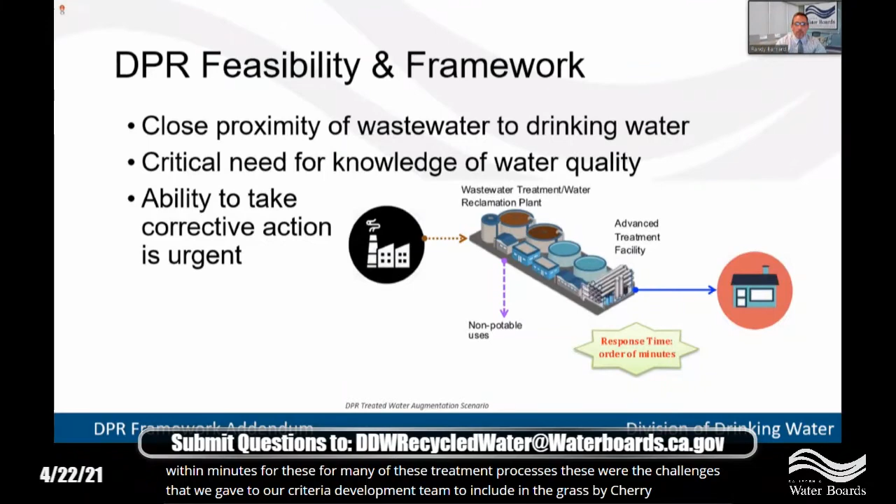So we need to know for sure what the water quality is going into the treatment process and coming out of the treatment process. And we need to be able to detect when there's a problem and be able to take corrective actions to prevent any off-spec water from getting to the public. And this has to happen fast, within minutes for many of these treatment processes. These were the challenges that we gave to our criteria development team to include in the draft criteria. So with that, let's take a look at that criteria. Next slide, please.

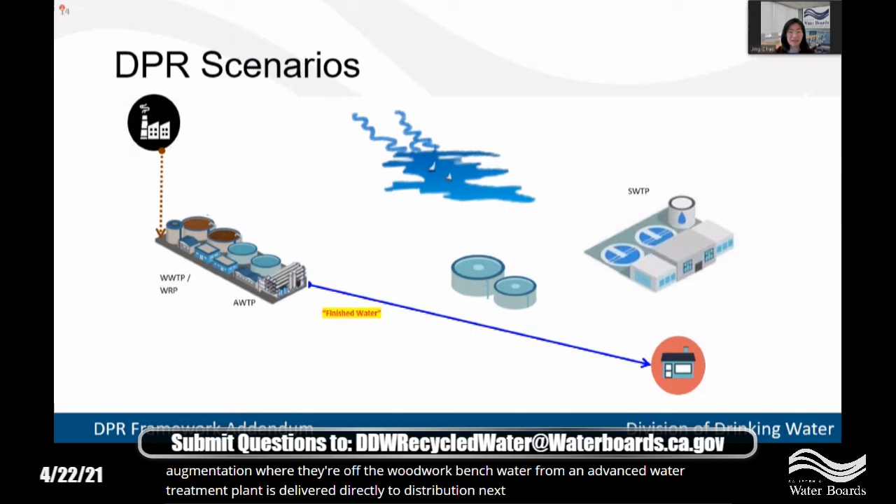We also considered complex DPR scenarios with multiple agencies and different qualities of water discharged for various reuse opportunities, ranging from non-potable to indirect potable to direct potable reuse. Through discussions with projects, we have a good idea of what DPR scenarios are being considered, but it is likely we haven't thought of everything. We're looking forward to comments regarding application of the draft criteria to DPR scenarios that we might not have considered. Next.

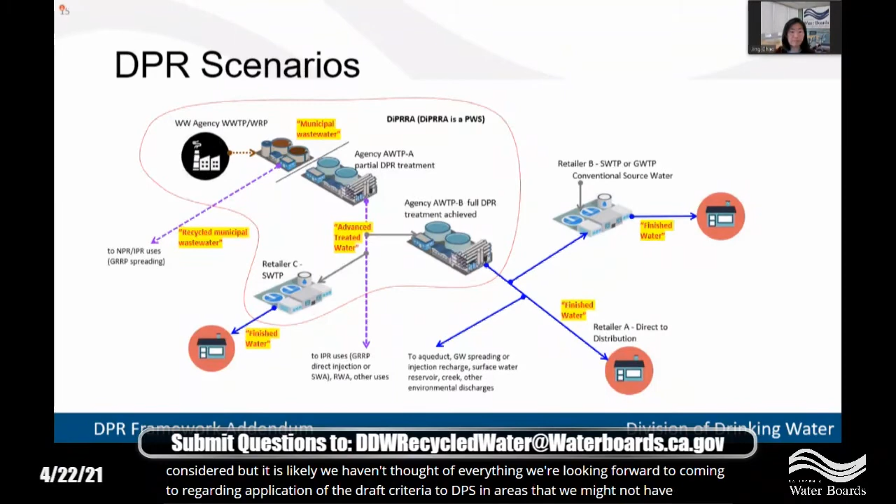So regardless of the complexity of a DPR project or the number of agencies involved, each project must designate one agency, called the DiPRRA, that will be responsible for submitting a drinking water permit application for the project and for complying with the DPR regulations and permit provisions. Similar to IPR requirements, a public meeting must be held for the project as part of the permit review process. Public water systems receiving finished water from a DPR project will also need to submit drinking water permit applications and receive permit approval from DDW before the new supply can be used.

The other agencies that are involved, including wastewater management agencies supplying the municipal wastewater source for the DPR project, and each agency that provides pathogen and/or chemical treatment pursuant to the DPR regulations will be required to be partner agencies in the joint plan. So the joint plan describes the partner agencies involved in the project, the roles and responsibilities of the partner agencies, the legal authority of each to fulfill its role, and the overall organizational structure involved in implementing the joint plan, among other things.

The DiPRRA must submit an updated joint plan when there's a change in the organizational or legal structure of the DPR project management. Each agency in the joint plan needs to demonstrate TMF capacity. Establishing the legal authorities, roles, and responsibilities, and the structure of the overall DiPRRA organization for the DPR project is foundational to ensuring safe drinking water. Next.

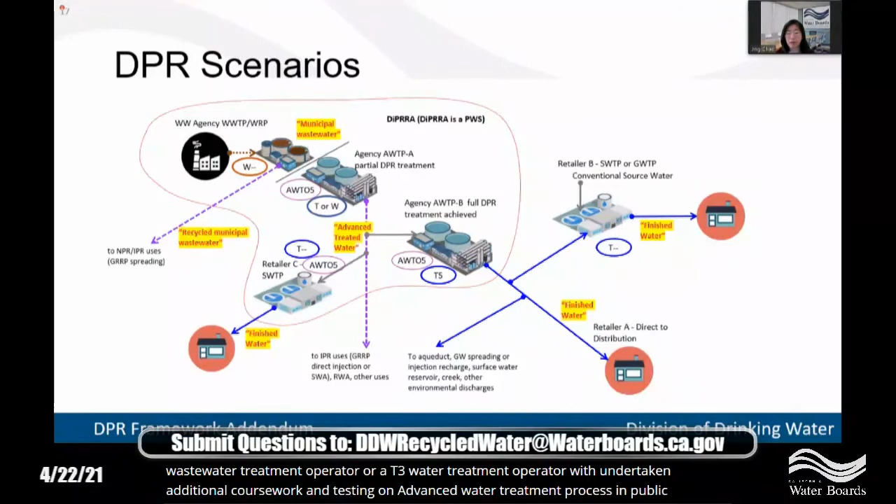An operator with an AWTO certification is at minimum a grade 3 wastewater treatment operator or a T3 water treatment operator who has undertaken additional coursework and testing on advanced water treatment processes and public health safe drinking water concepts. The AWTO certification program was established jointly by the Cal Nevada AWWA and CWEA in 2019. Now with that, let's go over to the next section where Bob Hultquist will speak on the pathogen criteria. Thanks. Bob?

Thank you, Jing. Pathogenic microorganisms pose an acute threat unless continuously controlled by removal and inactivation. Several sections of the criteria deal with the control of this threat. Next slide, please. First, an overview of the pathogen control components. We set pathogen reduction targets to achieve specific health risk goals. Treatment reliability is achieved by requiring multibarrier treatment, diverse mechanisms in that treatment, and redundant treatment. Redundant treatment is extra treatment above that minimally necessary to make safe drinking water from the wastewater. And redundant treatment was called for by the state's direct potable reuse expert panel.

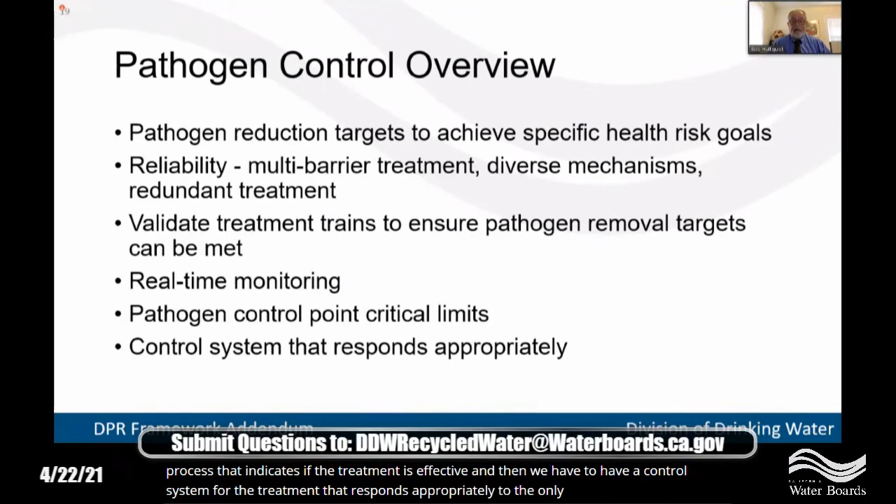We validate treatment to ensure the pathogen removal targets can be met. We require real-time monitoring, that's online monitoring of treatment performance for each process. We set pathogen control point critical limits. The pathogen control point is the effluent from each pathogen removal process. And the critical limit is a monitoring value for each treatment process that indicates if the treatment is effective. And then we have to have a control system for the treatment that responds appropriately to the online monitoring information. Next slide, please.

We establish a risk goal for these criteria for pathogenic microorganisms. In drinking water regulations, such as the surface water treatment rule, the goal has been 1 in 10,000 chance of infection per year for an individual. We've also used that goal for our indirect potable reuse regulations. For direct potable reuse, because of the close proximity of the wastewater pathogen levels to the drinking water, we've decided we need a daily risk goal. In other words, we want very consistent production of safe water out of this treatment plant. So we divide the annual risk by 365, and the criteria have been designed such that every day that daily risk will be met.

We establish reference pathogens. That's a set of pathogens that if we regulate and if they're controlled, all microbial risk will be dealt with from the wastewater. We've selected virus, Giardia, and Cryptosporidium, as we did for our indirect potable reuse regulations. Those are the same reference pathogens used in the drinking water surface water treatment rule. Indeed, direct potable reuse has to comply with the surface water treatment rules, both the federal and the state, because the wastewater can be considered a surface water.

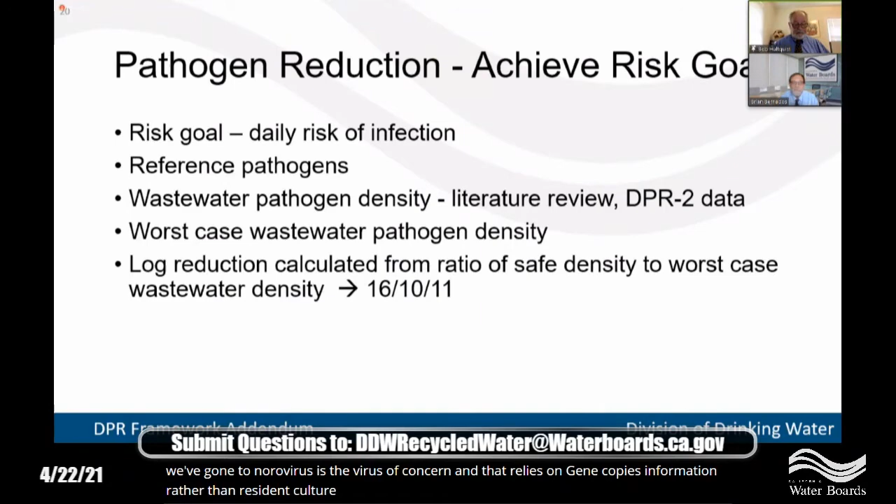We achieve reliability in the treatment for pathogens by requiring for each reference pathogen at least 4 effective pathogen treatment processes. And they have to include at least 3 different mechanisms for pathogen reduction. And we specify in the regulation physical separation, chemical disinfection, and ultraviolet disinfection.

The redundant or extra treatment called for by the expert panel, we're determining the amount of that extra treatment using a quantitative microbial risk assessment approach to evaluating failure scenarios. In other words, what sort of plausible or possible failure might quantify the extra treatment that would be needed. And the failure scenario we ended up with indicated a four log reduction of treatment loss was possible. And so we've added that on to the minimum treatment necessary to provide safe water as a design requirement.

So the overall design of a treatment train has to be able to achieve 20 log, 14 log, and 15 log respectively for the virus, Giardia, and the cryptosporidium. Next slide, please.

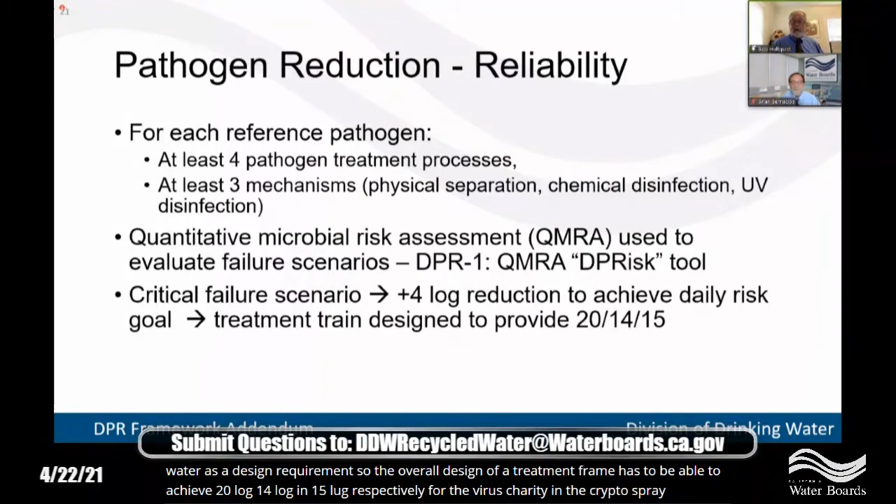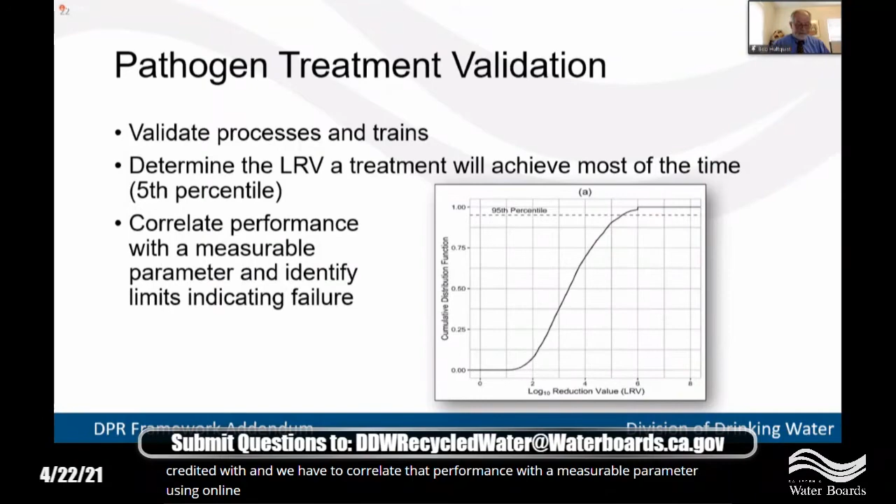And we credit each process with its 5th percentile log reduction. And that's down in the lower left-hand end of the curve. So 95% of the time, the process will be achieving better treatment than we credited it with. And we have to correlate that performance with a measurable parameter using online monitoring. Next slide, please.

Briefly, we validate each process by identifying the mechanisms of pathogen reduction by that process. We don't approve black boxes. We have to fully understand how the process works for each of the pathogens. We have to identify the pathogens to be used in the demonstration study or the surrogates for those pathogens. We have to identify the influencing factors that affect the efficacy of the process, things such as temperature, pH, loading rates.

And the study has to describe the method to collect and analyze the data. And again, the lower 5th percentile log reduction that it achieves during the study is the credited log reduction. And we determine critical limits, critical limit being the cutoff point for the monitoring data where you no longer have confidence in the efficacy of the process. Next slide, please.

The treatment train for log reduction for virus, Giardia, and cryptosporidium is the sum of the treatment process individual 5th percentile log reductions. Any pathogen control point parameter that is not meeting the critical limit means the treatment process is not allowed the credited log reduction, and the control system deletes that treatment process in its compliance calculation.

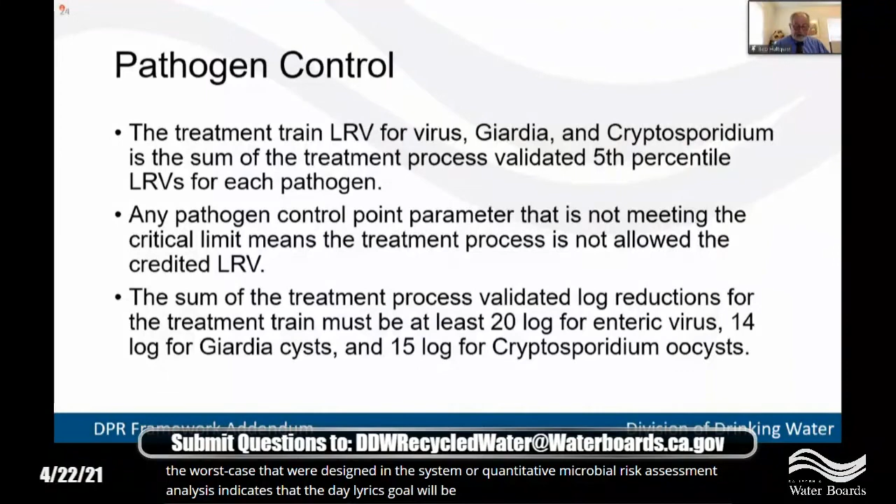And it should also be noted that the extreme wastewater pathogen densities the treatment is designed for occur rarely. Most of the time, the pathogen densities are much lower than the worst case that we're designing the systems for. And quantitative microbial risk assessment analysis indicates that the daily risk goal will be met by systems meeting the treatment criteria. Next slide, please.

We have operational requirements for the treatment train. The project must discontinue delivery to the drinking water system if the treatment train does not achieve the 16, 10, and 11 logs for virus, Giardia, and cryptosporidium. Those are the minimum necessary to go from worst case wastewater densities to safe drinking water. It must discontinue delivery if the minimum number of treatment processes that we specify are not working, or if the treatment mechanisms, the three diverse mechanisms, are not operating.

It must discontinue within 24 hours if the treatment train does not achieve the design requirement of the 20, 14, and 15 log removals. This requires that the redundant or extra treatment must be restored quickly if the treatment train log reductions fall below the total design requirement. Next slide, please.

Pathogen treatment and monitoring control. Treatment log reductions must be tracked continuously with the SCADA system. That's the control system for the treatment train, utilizing online monitoring for each process that was approved to receive credit for pathogen reduction. The control system must have associated alarms that indicate when the process is not operating as designed. The control system must be designed to identify a failure of a process to meet its critical limit.

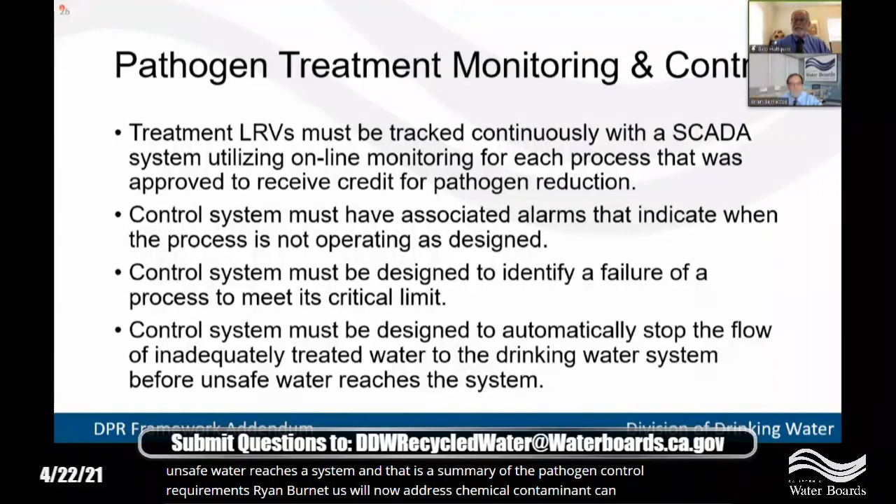I'm Brian Bernados, and I am in the recycled water unit. And this is a big day for us. Looking back over the last 10 plus years, I've been personally thinking about this since 2008, when I had the privilege to go to the Singapore International Water Week, and I heard Ian Law talk about how DPR is feasible. So I've been thinking about this, and our department's been thinking about this for a long time. So here we are. This is a big day.

I'm going to talk about chemical control, and in a way, that's some of the most important considerations. So briefly, we're going to cover source control, the chemical control requirements, operations for that, and the control points, monitoring at those points, and response plans. Next slide, please.

The goal of focusing on chemical control: the threat posed by chemicals in direct potable reuse means that advanced treatment must be provided to control the potential chronic exposure hazards from a wide variety of regulated and unregulated chemicals.

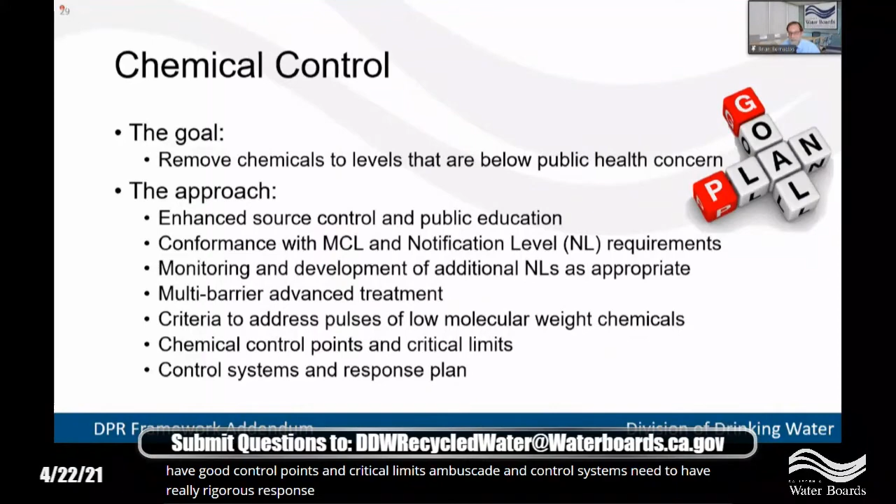So now digging into enhanced source control. First, we start with the requirements that are existing in our IPR regulations, both in groundwater and surface water or reservoir augmentation. We add to that a need to do a risk assessment for contaminants identified as part of source investigations. In other words, we want the DIPRA to assess potential hazards in the sewer shed. We want them to utilize local limits and other discharge control methods that would be designed to protect water quality for potable reuse.

So they need to consider chemicals that may pass through our advanced oxidation and RO. We want an audit by an independent party of the source control program every 5 years. And we want them to have some sort of system that would give an early warning of potential chemical peaks.

Now, that could be online monitoring at critical locations. And this is becoming feasible, as was noted in the recent Water Reuse Symposium, which had a whole section on this, and an existing Water Research Foundation report, 1730, that's available for you to look at. And there are ongoing research projects, several of them being held now. So this is becoming a really interesting area.

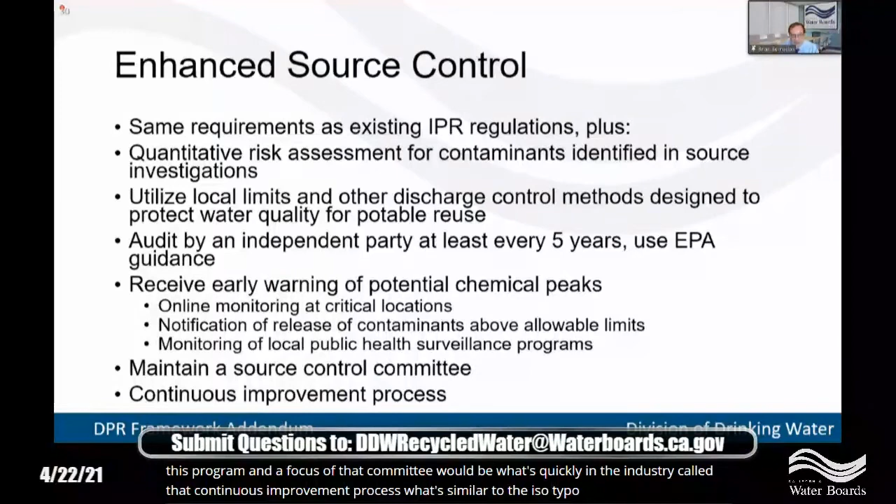Now, I want to remind you of that 2016 report by the expert panel entitled Feasibility of Developing Uniform Water Recycling Criteria for Direct Potable Reuse. I picked a quote from that. They said, to be feasible, DPR systems must meet or exceed the attributes of robustness, resilience, and reliability that are in indirect potable reuse. They said robustness is defined by the presence of different types of treatment processes acting via different mechanisms, such that a yet unknown pollutant likely would be removed on multiple stages. So here's an example: biodegradation is a good mechanism, separation, and advanced oxidation.

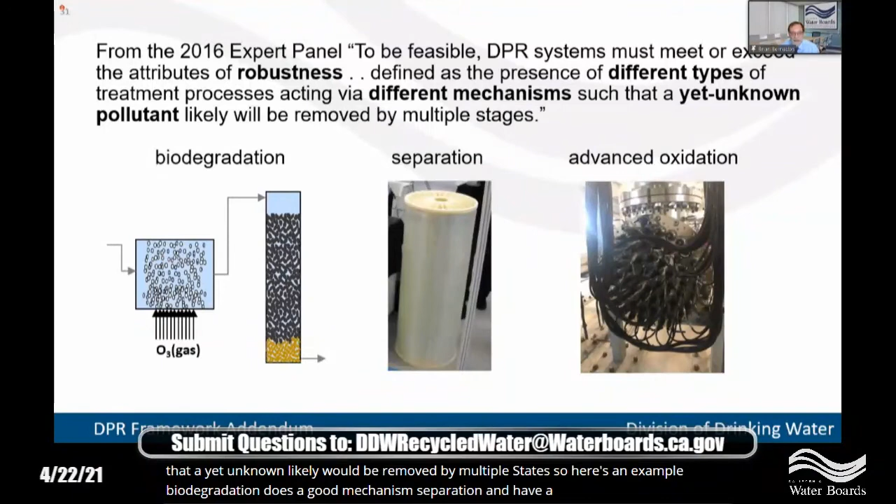Next slide, please. So this means we have multibarrier treatment. And the treatment train must consist of at least 3 separate treatment processes, as has been mentioned by Bob Hultquist, with diverse mechanisms for chemical reduction as well as pathogens. So that means including ozone biological activated carbon, a reverse osmosis that provides separation, and an advanced oxidation process.

The design criteria for ozone BAC is specified later. And these systems, all 3 of them, must have continuous performance monitoring, at least one surrogate or operational parameter that indicates when treatment is not being performed as designed. So for example, these are well known in the industry. Ozone to TOC ratio is one surrogate online. UV absorbance is another one, TOC online, and of course, calculation of UV dose. And these all need to be demonstrated to be on spec at full operating conditions. Next slide, please.

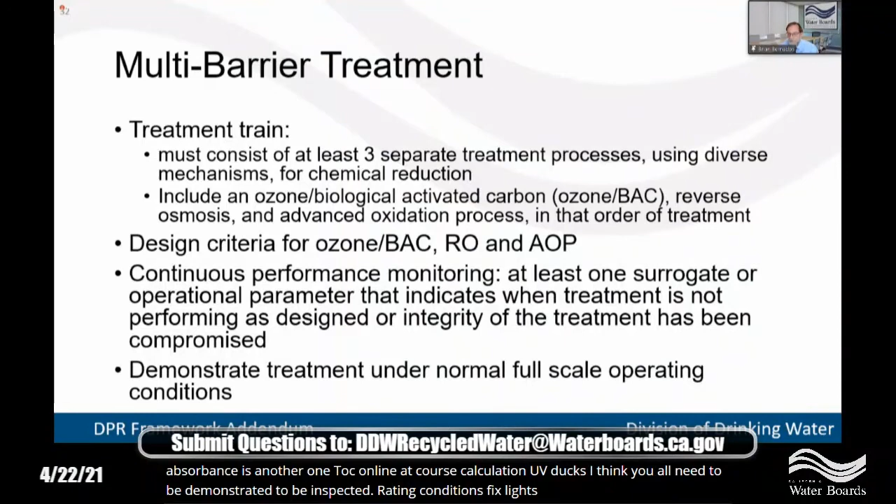So I want to go into one of the research projects in depth, which was DPR-4, that looked at chemicals and particularly peaks of chemicals. And so it's an excellent look at what type of things could address peaks. And so basically they were asking, what options beyond RO and AOP are out there? Now, of course, blending is one, and that works for any peak, but you need a lot of it. And that's what we rely on in our reservoir augmentation regs, having a large open reservoir or lake.

Another they looked at was ozone biologically activated carbon, which works on formaldehyde that may pass through RO and AOP, and other things like acetone. They looked at granular activated carbon, and that works really well for disinfection byproducts like total trihalomethanes. And we're learning that it works for a lot of the long chain perfluorinated substances. We're still not sure about the short chain perfluorinated substances, and more research is being done by EPA and others. It works for a lot of VOCs, but not the highly polar VOCs, and it does not work for formaldehyde.

They also considered air stripping, which is common in treatment of contaminated groundwater. It works on certain VOCs, but it depends on Henry's law constant. And there are some VOCs that don't respond to air stripping. And then they actually looked at a second pass RO. So in other words, going through full treatment of all the water in one RO, and then taking that and going through a second RO system. And of course, that would work, except it also has the weakness that RO has, that some neutrally charged low molecular weight chemicals are not addressed. Next slide, please.

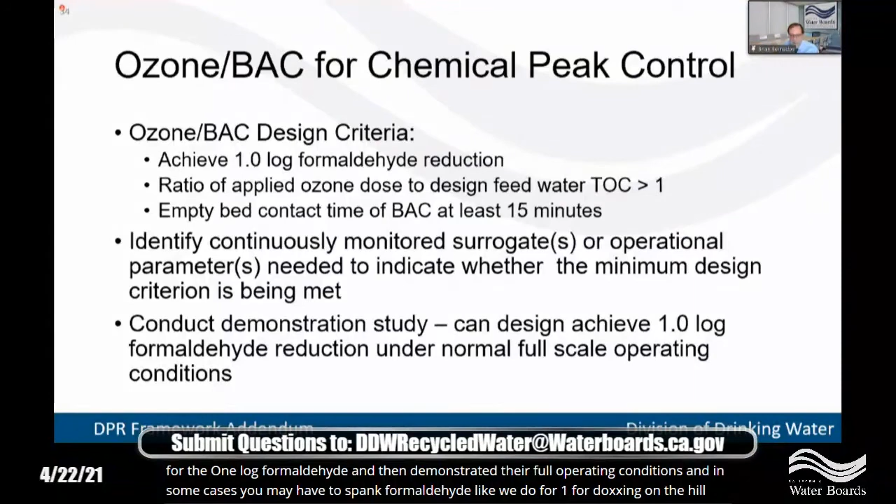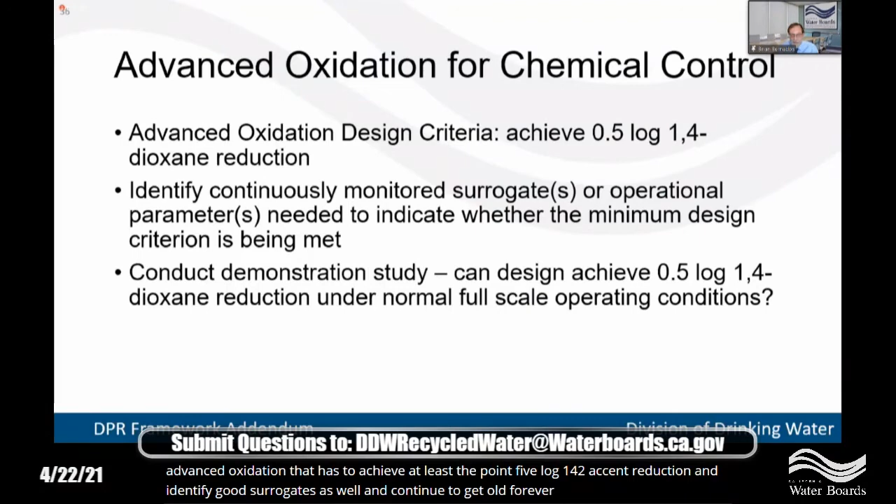Of course, we'll still maintain the advanced oxidation that has to achieve at least a 0.5 log 1,4-dioxane reduction and identify good surrogates as well. And continue, for a new plant, to prove that it works at full scale. Next slide, please.

Now, the effluent was tested to see what passed, and it was found that acetone was what passed the RO and the AOP. Fortunately, acetone is not that toxic. But what about things we don't know? So we wanted to address that, and our expert panel said we needed to address that. Next slide, please.

So DPR4 looked at chemicals that might pass RO and AOP. Fortunately, there are very few chemicals that actually do that. But chemicals that are low molecular weight, such as less than 100 molecular weight, could pass RO. And some chemicals are resistant to advanced oxidation, like formaldehyde. So to address this, we have 3 components in our regs. We have the ozone BAC. We have a requirement for continuous longitudinal mixing to attenuate a 1-hour elevated concentration of a contaminant by a factor of 10. And that could occur anywhere from the wastewater plant inlet to the place where it's effluent.

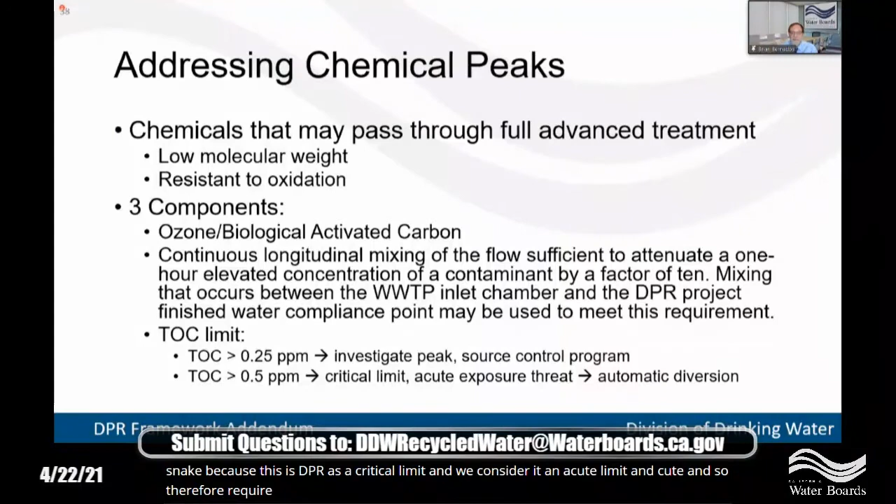We've also added additional TOC limits to address peaks and help investigate those. So above 0.25, an investigation of the source control program should be triggered. Like what's happening? Is there an industry doing something? And that early warning system should have given the DiPRRA some sort of clue of where to look. And also, as was mentioned earlier, we're going to have a limit of 0.5 for TOC because this is DPR, as a critical limit. And we consider it an acute limit, an acute threat. And so therefore we require automatic diversion above 0.5. Next slide, please.

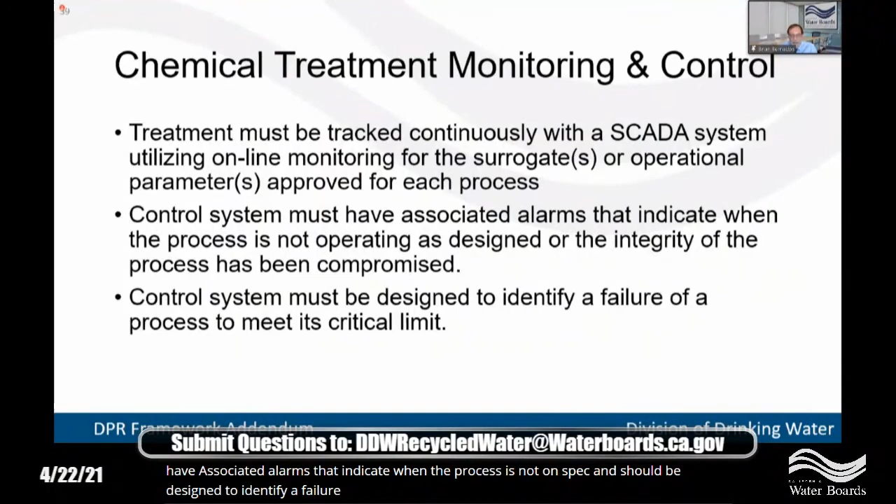So the monitoring and control, of course, is very important. And as I've mentioned before, these can be tracked continuously with the SCADA system. And those surrogates should be approved in the operations plan. The control system must have associated alarms that indicate when the process is not on spec. And it should be designed to identify a failure that doesn't meet its critical limit. Next slide, please.

So the response time, the critical control response time, is defined as the time it takes for a control system to identify and respond to an acute exposure threat. Now that includes the time interval between online measurements taken at a control point. So that could be anywhere from 1 minute to 5 minutes, depending on the instrument.

The time it takes for online measurements to be accessed and evaluated by the SCADA system, whether the critical control limit is being met. And so often the SCADA system will average these online measurements over a time period of 10 or 15 minutes to make sure that it is really something happening. Time it takes for the SCADA system to determine that the 0.5 limit has been exceeded, or if the nitrate online instrument exceeds the MCL, which is 10.

Time to actuate diversion or shutoff valve. So that could be anywhere from 5 to 10 minutes, depending on the size of the valve, shutoff valve. And divert or completely stop the flow to the distribution system.

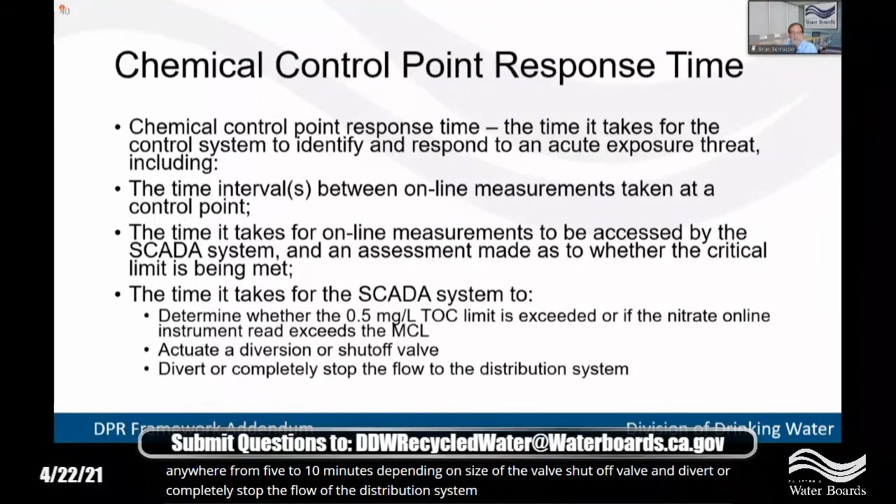Next slide, please. So the response time must be able to automatically discontinue delivery of the water within that chemical control response time identified above, which could be 15 minutes or more, as I noted. The time it takes for 10% of the water to flow along the flow path from each control point to the point of diversion or shutoff should be no less than the chemical control response time. Next slide, please.

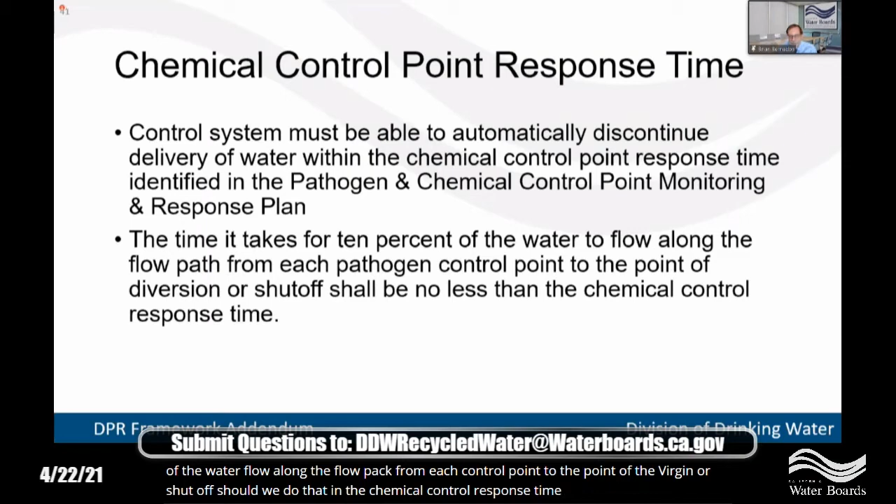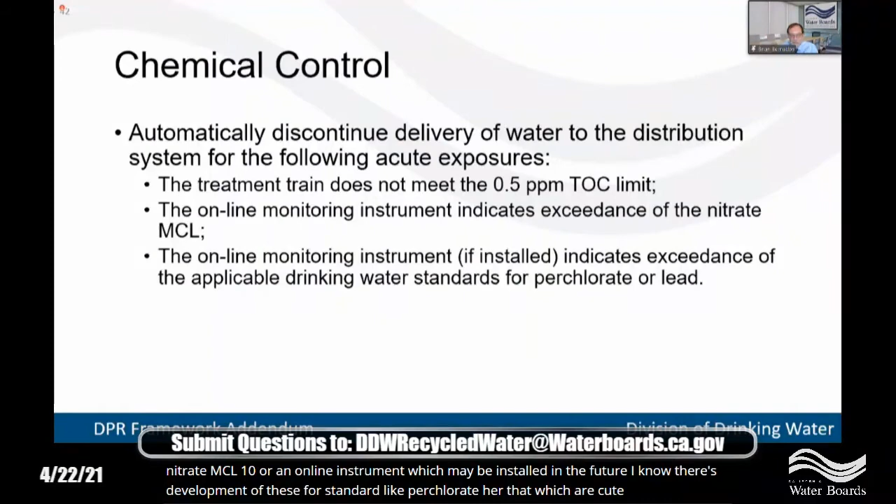So the system needs to automatically discontinue delivery. I'm reiterating, but this is important for acute exposures. So we're considering a TOC limit over the 0.5, an exceedance of the nitrate MCL, as I mentioned, 10, or an online instrument, which may be installed in the future. I know there's development of these for standards like perchlorate or lead, which are acute chemicals. Next slide, please.

And this needs to be optimized. The DiPRRA must do a chemical characterization and control study to evaluate precursors. Now we know that some things are precursors that form into toxic chemicals. And the production of these byproducts, including disinfection byproducts, and then options for optimizing and reducing these types of byproducts to protect public health. And incorporate this optimization strategy into the operations plan.

So that concludes my summary of the chemical control. I'm going to hand it over to Jing, who's going to explain a lot of other miscellaneous things in our reg. All right, thanks, Brian. So I will briefly go over the rest of the sections of the early draft. All right, so now we're on the next slide.

Let's see, water quality monitoring. So the draft criteria specifies monitoring for regulated contaminants, which are contaminants with a primary MCL, a secondary MCL, or action level, and also unregulated contaminants. So this is similar to the monitoring requirements for IPR and extremely impaired drinking water sources. The criteria specifies sampling at the feed to the DPR plant, sampling immediately after the advanced oxidation process, and sampling of the finished water prior to distribution. Next.

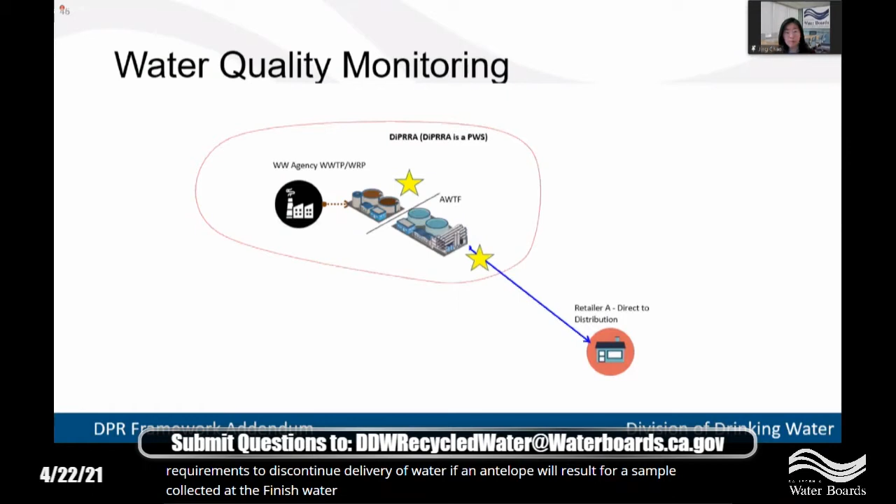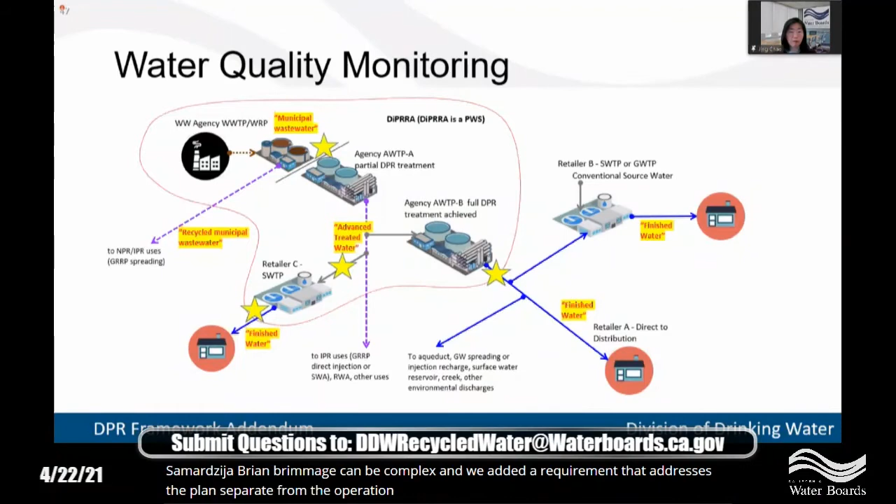Now for a complex DPR scenario, the monitoring requirements can be complex. And we added a requirement that addresses the submittal of a monitoring plan separate from the operations plan for this purpose. Next.

We kept an alternatives section in the DPR draft. The alternatives section in the draft is similar to the one in the surface water augmentation regulation, and we added detail to the chemical treatment alternatives.

So for chemical treatment, the alternative train must use 3 different treatment mechanisms with a required separation mechanism. It must use validated technology, or the project must conduct a demonstration study to demonstrate the treatment efficacy of that new technology. It must demonstrate the alternative provides equivalent or better performance, and also that it assures at least the same level of public health protection. Next.

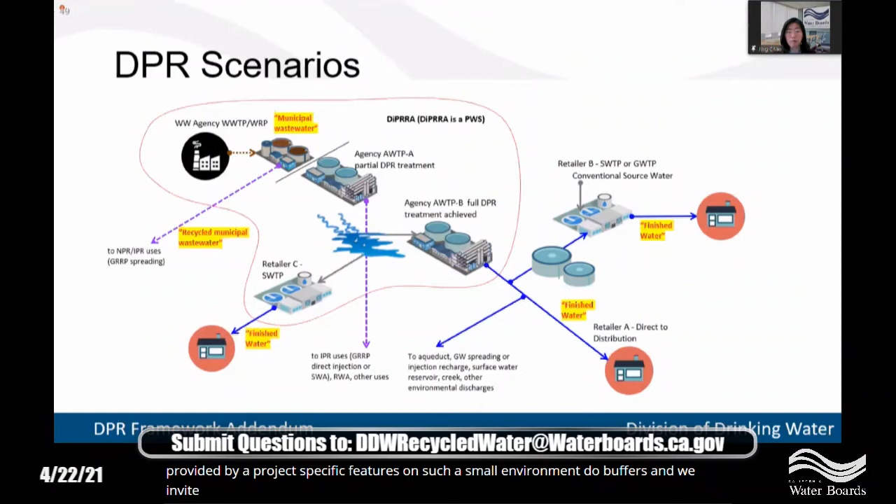So we made the alternatives section flexible enough to allow consideration of benefits provided by project-specific features, such as small environmental buffers. And we invite the stakeholders to test scenarios against the criteria and provide any feedback to us on this. Next.

And finally, plans and reports. The draft refers to a number of plans or reports that must be submitted. So most of this reporting is information we already require of public water systems to submit, such as the ones shown in blue and the overlap. The others are existing reporting that the IPR projects are already required to do, such as the joint plan and

the annual report. The two plans that are new are the water safety plan and the pathogen and chemical control monitoring and response plan. The control plan, which Brian and Bob talked about. The water safety plan is an independent risk assessment to identify risk management controls as a precaution against unaddressed site-specific hazards. The assessment must be submitted with the engineering report and updated at least every 5 years or following any incident caused by a lapse of control or inability to properly manage a risk.